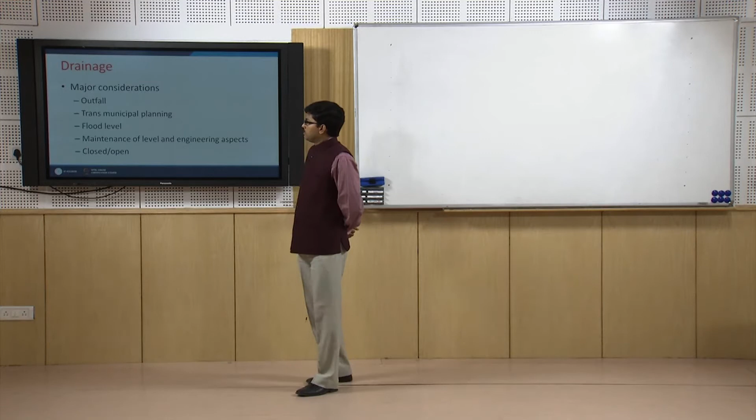So for this we already had a discussion on the last day covering a few points. For any drainage development, what are the major considerations? Before we come to the points - drainage is important because to develop any township or city, the most important aspect of vulnerability of a particular area is the flood situation.

During any rainy season, an area can go below flood level and flood water can come in. So it is always important to check the flood level of any area before development of any housing project. So flood level - maintaining the flood level - is very important.

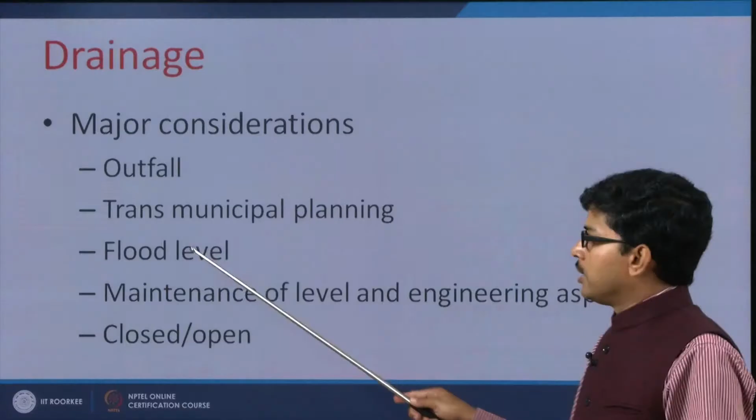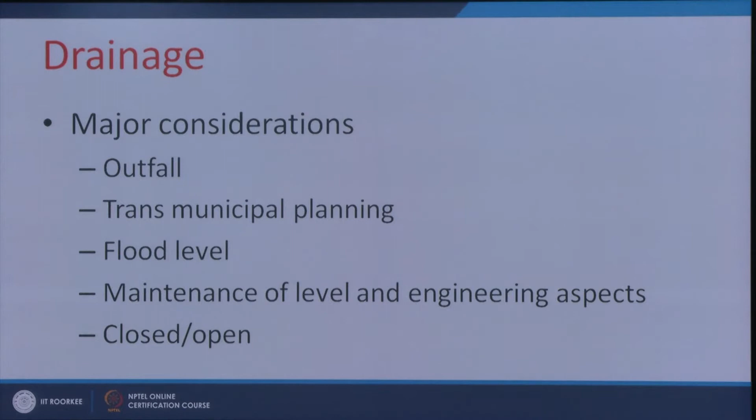Apart from flood level, another point is outfall - where the drainage water, the surface drainage water, will go and be disposed of. For any housing or township development, huge areas are under concreting or hard surface. Because of the hard surface, it does not absorb the rainwater or surface water, and as a result this water comes to the outfall area.

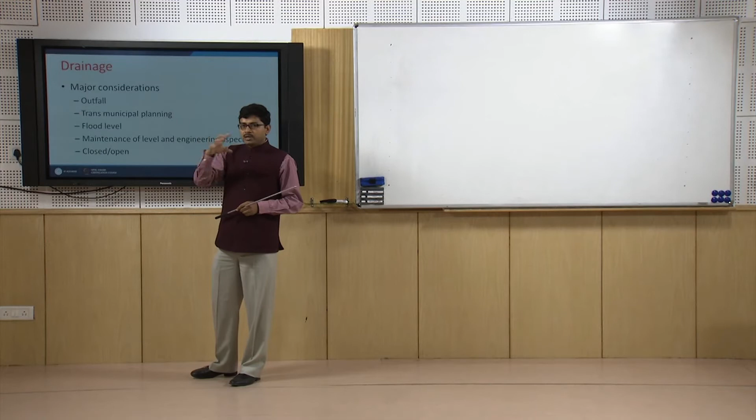Outfall can be for a city or an overall township, or outfall can be at the local level. In some places, a particular municipal area, town or city may not have outfall because of its location. So there could be a possibility of trans-municipal planning - we can take a few municipalities, smaller and medium townships, and combine them to make a larger drainage facility, orienting and guiding them to a larger outfall facility.

Also, maintenance of level and engineering aspects are very important for housing development. We can go for closed or open drains. For drainage, one major point is that along roads we provide drainage on both sides - like last day we discussed arterial roads, sub-arterial roads, collector and local roads. For each kind of road, surface drainage is provided, and those drains could be closed or open.

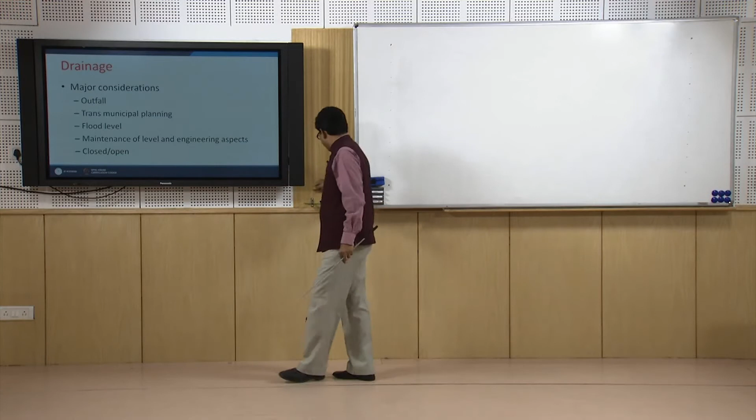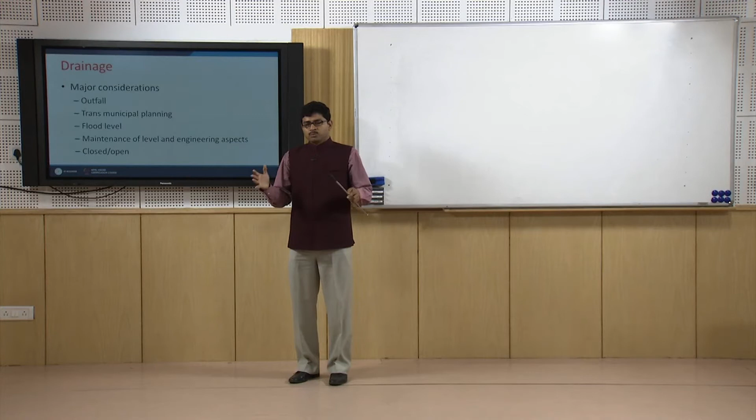One more point - if the township is very huge and large, for maintaining the slope, sometimes a lifting facility or drainage pumping station could be required. For drainage space generally you don't need a separate space for design, because it's accommodated along the road, but for a pumping station you definitely need a bigger chunk of land, so that water can be pumped to a different level and go to the final outfall, which can be a river, canal, or any other natural outfall.

Usually for the final or external outfall, we treat natural sources of water as the major means of outfall. Apart from drainage, we have power supply or electricity. Electricity can be generated through four different modes - thermal power plant, nuclear power plant, hydro power plant, or renewable energy.

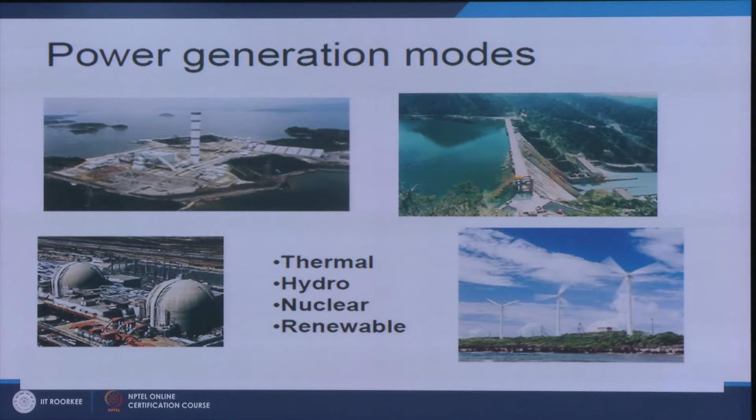For housing development or city development, we need to establish the areas where substations will be put, at various levels based on the city level or local level. These area requirements are listed in the norms and codes.

Apart from the substation area, we need to accommodate electrical installation along the road. Sometimes the electricity wires are put underground, or they can be overground. Whatever it is, we need a dedicated space for electrical installation along the road and at the substation area.

If you are going to develop a large area of land in a bigger housing or township project, you have to keep some area ranging from 2 to 5% for power generation, power distribution, electrical distribution, the substation, and the distribution wires along the roads.

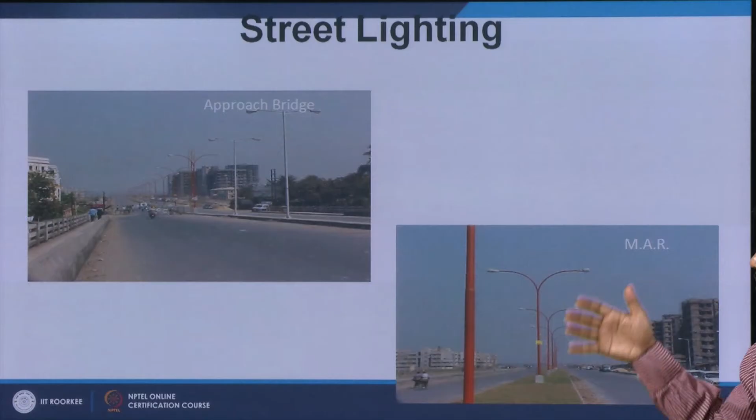Along the road you can put areas for the street lights, and on both sides, if the road is very wide like an arterial or subarterial road, the electrical installation can be accommodated.

Then we come to sewerage and sanitation. This is very important, because without this facility, a raw plot or agricultural plot does not become a livable plot. There are separate systems of sewerage and sanitation, and the objective is to have sustainable disposal of human excreta and related liquid waste.

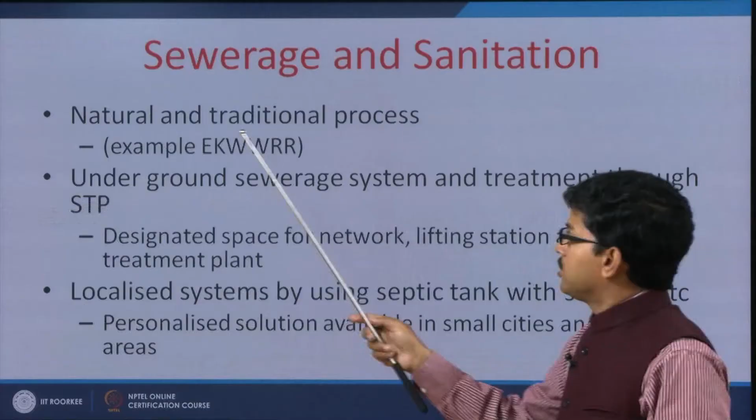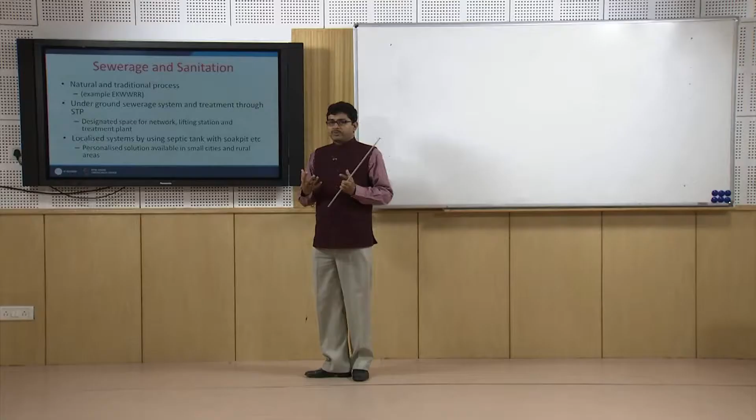One approach is the natural and traditional process. For example, the East Kolkata wetlands and waste recycling region is a very huge recycling region where a natural process recycles the wastewater and sewer.

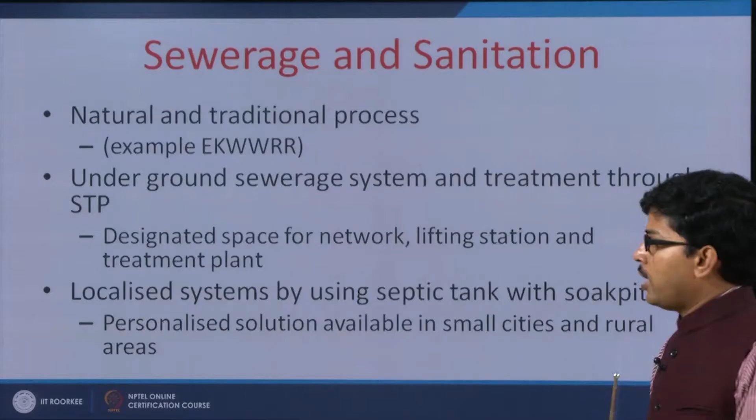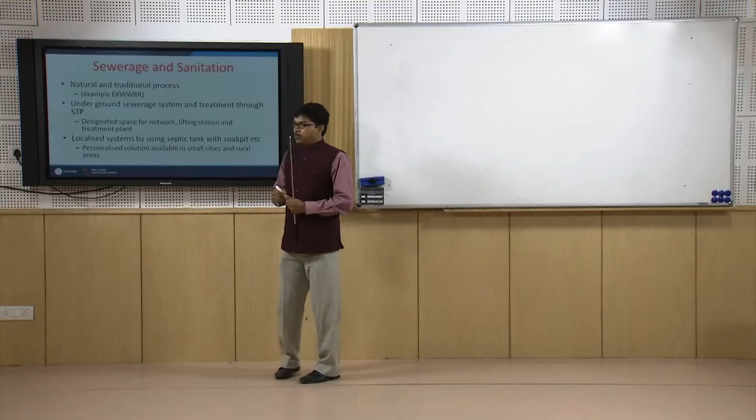Apart from the natural process, there could be an underground sewerage system where you establish a sewerage treatment plant, and from the treatment plant you can have several distribution ducts, as in a planned underground sewerage system.

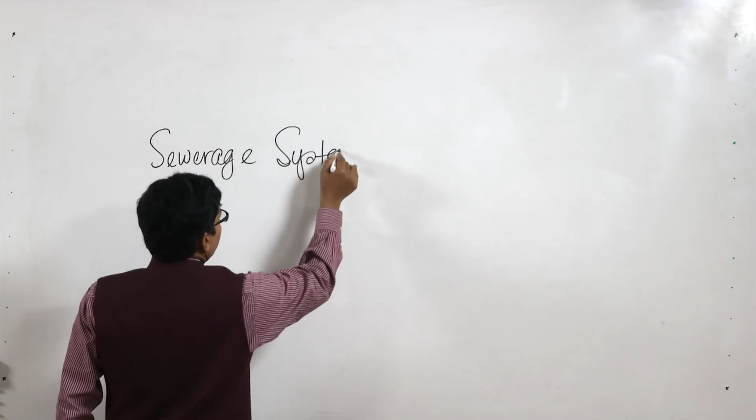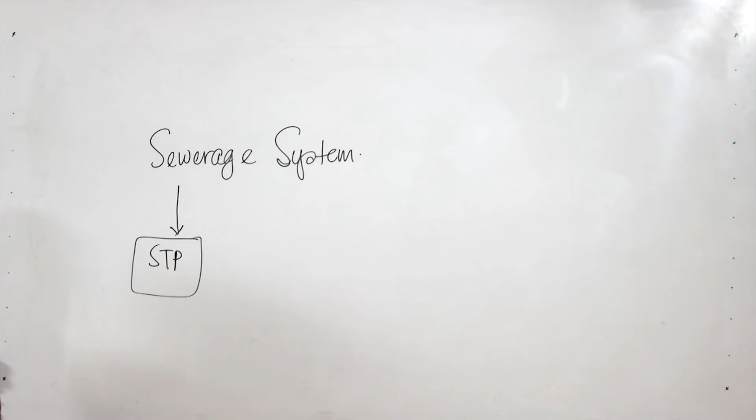You have the STP. Now STP takes a very huge area, 50 to 60 hectares in a bigger project, and from the STP you have to have the distribution.

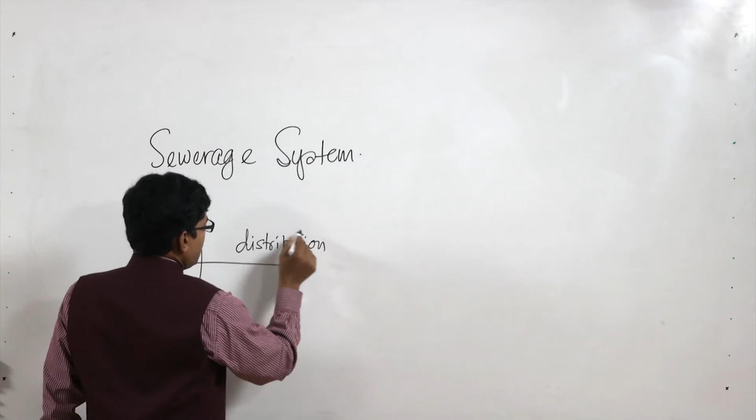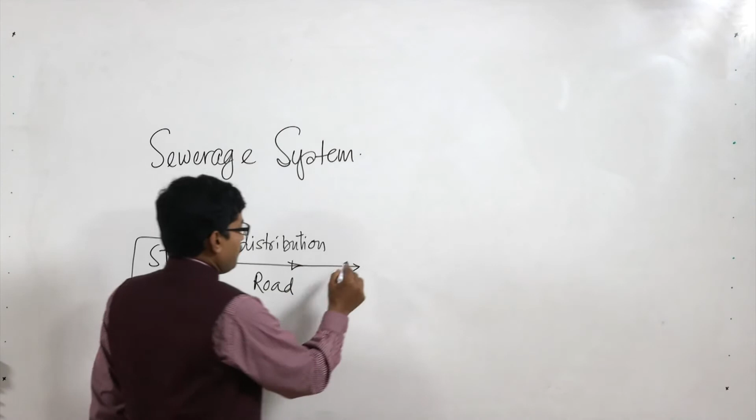The distribution runs through the road, below the road, or sometimes it can be distributed below the ground in green open areas. And to maintain the slope, sewerage lifting stations are also provided.

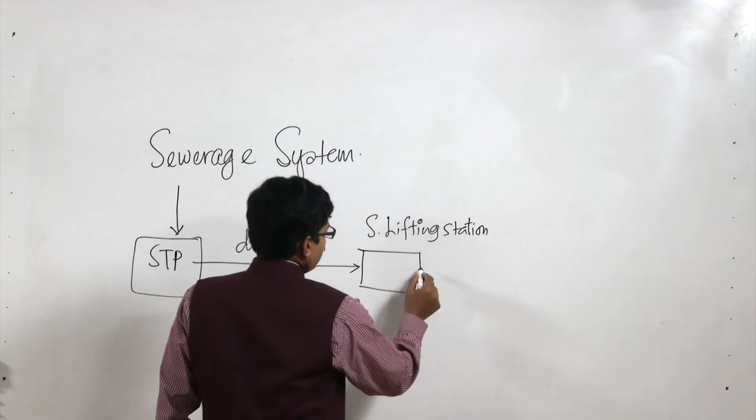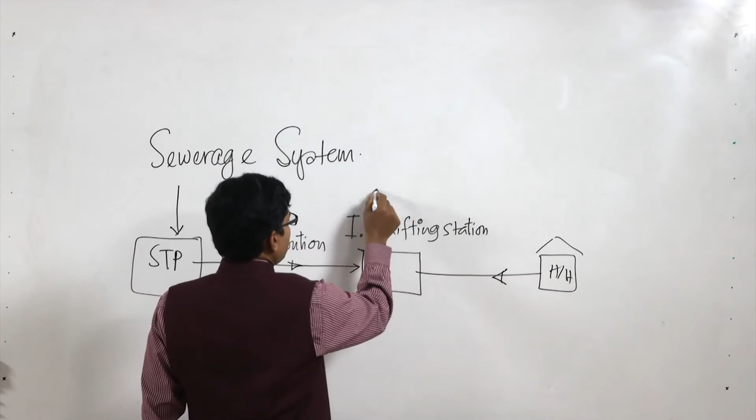This is the household, so from the household the sewerage comes like this to the intermediate sewerage lifting station, ISLS, and from the sewerage lifting station the sewer comes to the STP for treatment. This is the fundamental process.

The intermediate sewerage lifting station requires some amount of space, ranging from 50 to 60 meters by another 50 to 60 meters, and the sewerage can be taken below the road or below any other open space.

For example, if this is a local road, last day we discussed the sections of various kinds of roads. Usually sewerage is taken below the road through sewerage pipelines, whereas the drainage is arranged differently.

The objective is that surface water can come to the drainage, and also the water from the household.

This is the building. From the building the surface water can come to the drainage box, and also from the road the water can come to the drainage box.

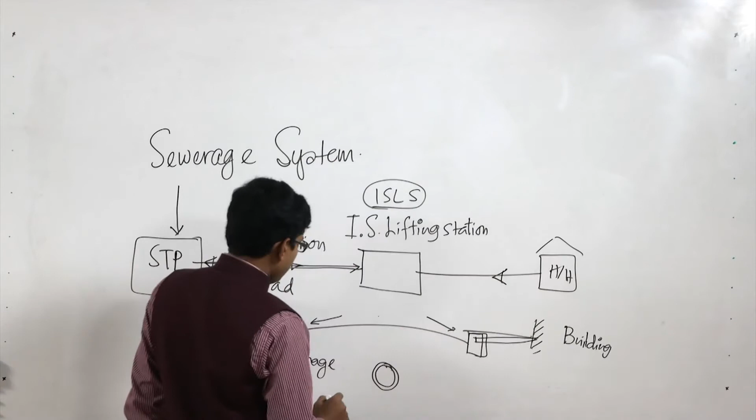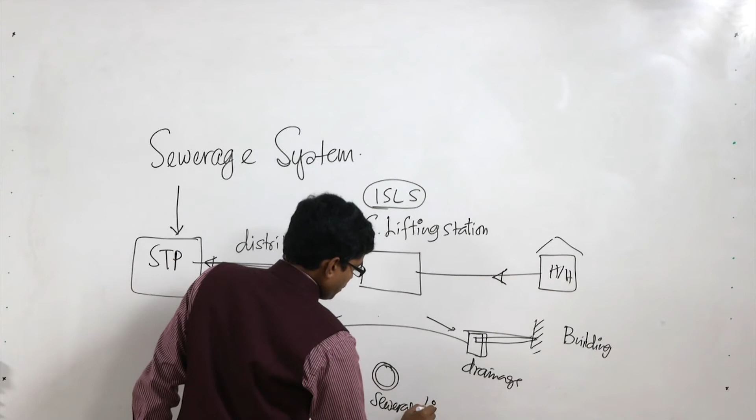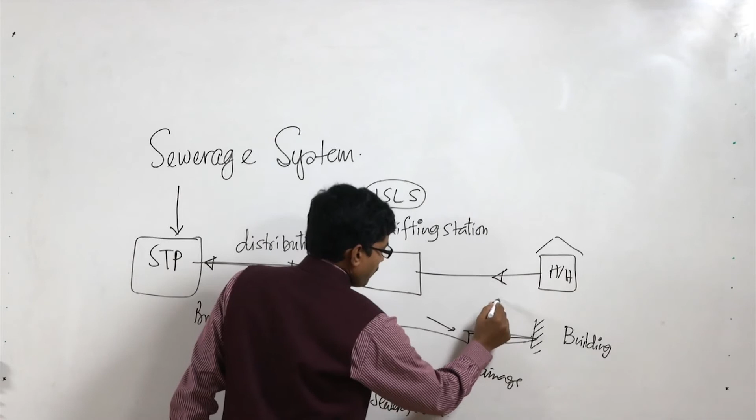Drainage can come on both sides of the road, and this is the sewerage line. We can also keep dedicated space for electricity. So this is the arrangement for local roads.

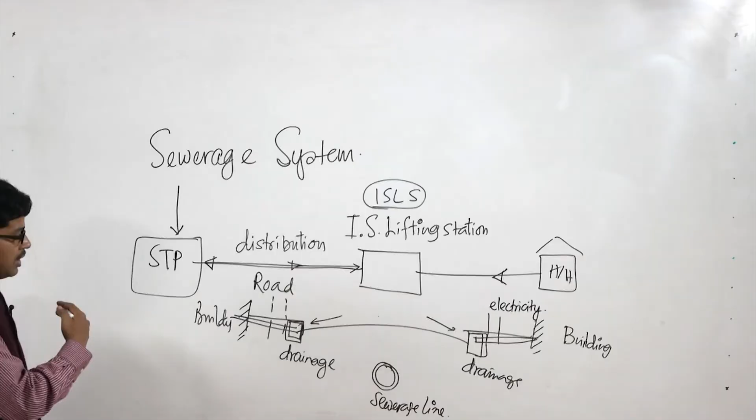If it is an arterial or subarterial road, similarly this can be distributed over the whole area, and a greater number of drainage pipelines or drainage boxes can come in that case.

Apart from the sewerage treatment process, including the sewerage treatment plant, lifting station, and network, there could be a localized system like the septic tank or soak pit, which is popular in various rural and suburban areas, where an individual family, a standalone housing project, or a small community can have a bigger septic tank for their sewerage or sanitation facility. This personalized solution is available in small cities and is very popular.

The advantage of this facility is that it is maintained by individual initiative, so the authority does not have to put in any extra money. But the disadvantage is that sometimes it can create problems in the area because of non-maintenance.

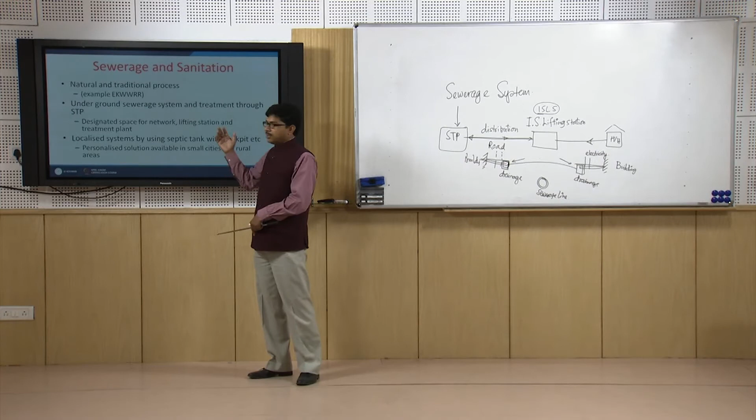The advantage of the underground sewerage system is that it provides land suitability and an effective system using a minimum amount of space, since you are not using space for a septic tank. That space is saved through the sewerage network, but it is definitely a costlier option than the individual septic tank. So both have advantages and disadvantages as far as township and housing development is concerned.

So, this is the example of the East Kolkata wetland and the wastewater recycling region, which basically recycles the waste and the sewer water from the city of Kolkata. Lot of natural water bodies are there, and these water bodies have fish. The fish are sewage fed, and because of the sewage feeding they recycle the sewage in a natural way. So, this is one unique example.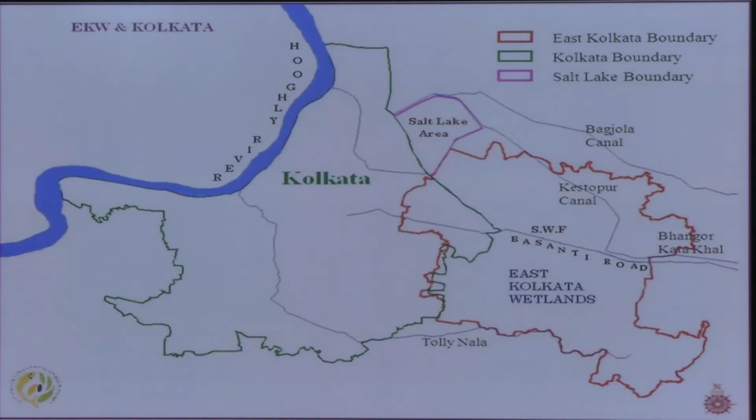Because of this unique example, the residents of Kolkata or the housing projects over there get the benefit, but definitely for other areas like New Town Kolkata or other cities we showed, they need to have a sewage treatment plant or a personalized facility like the septic tank.

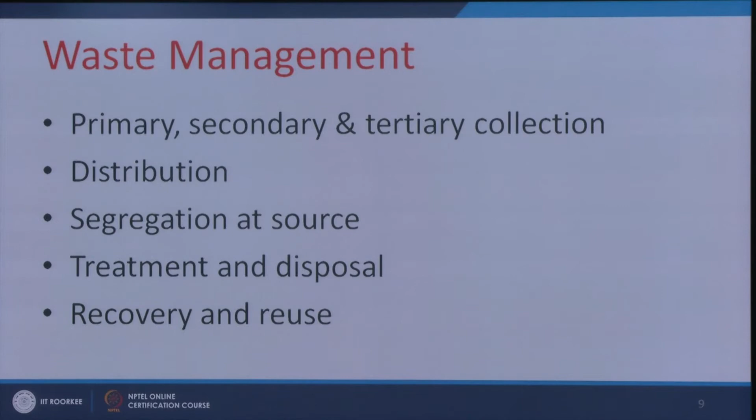The second important part is waste management. For any housing area or locality, you have seen that one of the major problems in today's life is waste management. Everywhere you will find that solid waste or liquid waste is lying in the road or open areas. You have heard about the Swachh Bharat Abhiyan.

The objective of the Swachh Bharat Abhiyan is to have 100% waste management in our cities or housing areas, and also to eliminate open defecation for our country. So, apart from the Swachh Bharat vision being a mission for all of India, for every housing project or township development, waste management is an essential service, essential infrastructure we should establish.

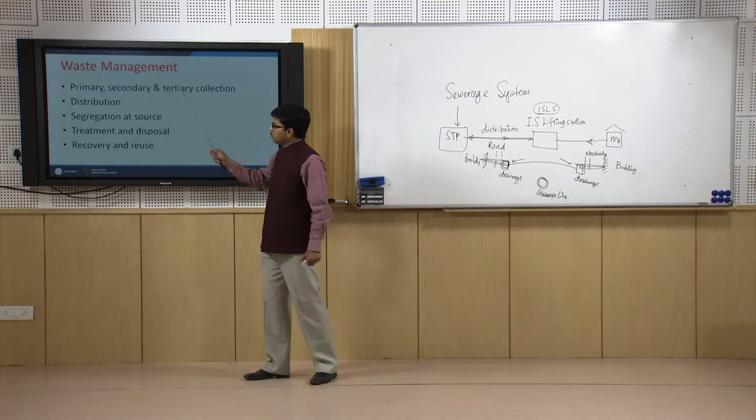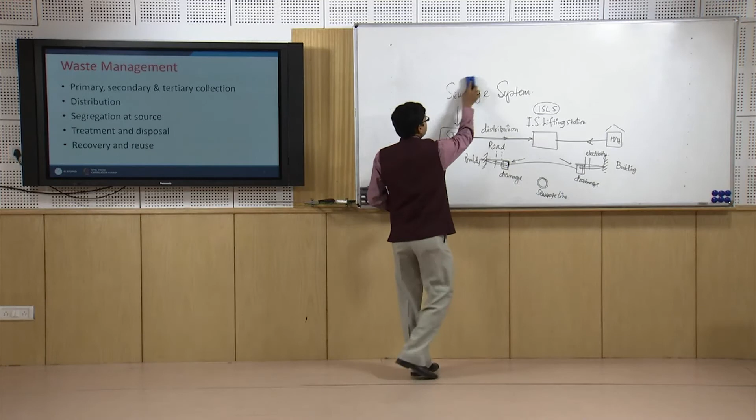So, waste management has several stages like collection, distribution, segregation, treatment and recovery. We have several stages of collection. It can be collected at the household level, and at the household level the waste can be collected.

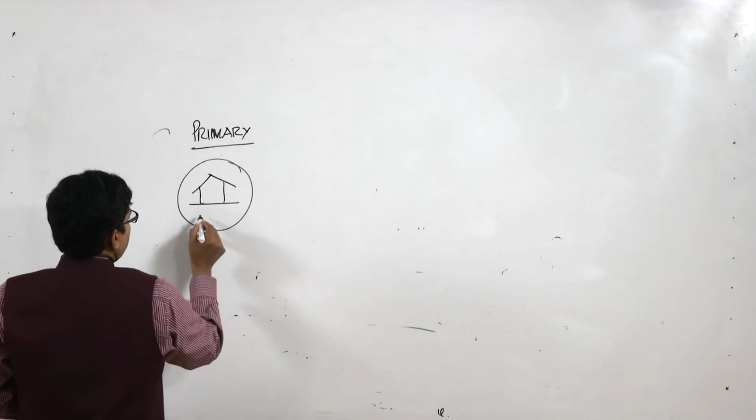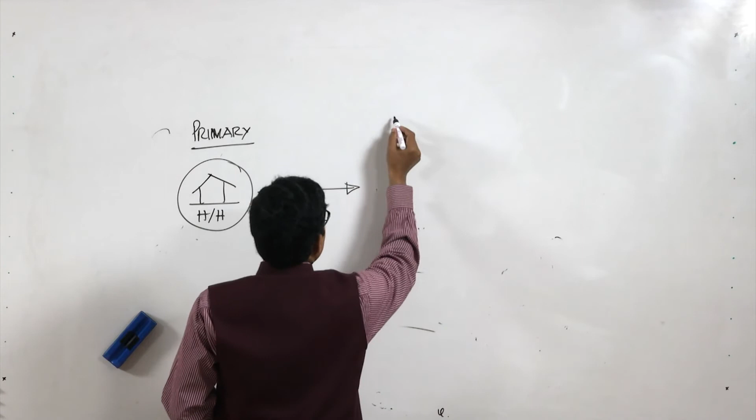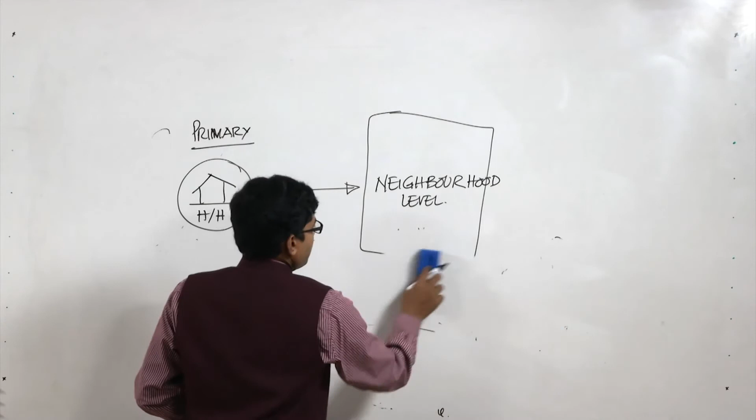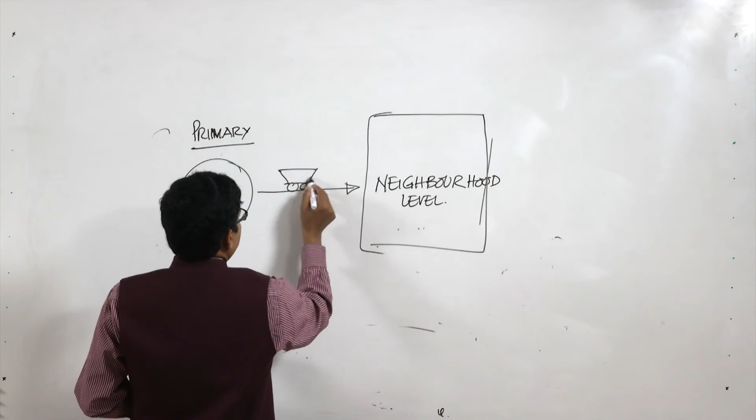At the household level the waste can be collected and then carried to the neighborhood level. The neighborhood level collection can be through the garbage vats provided by the municipal authority, or it can be carried out by manually transported carts from the household to the neighborhood level. So, this is the primary collection.

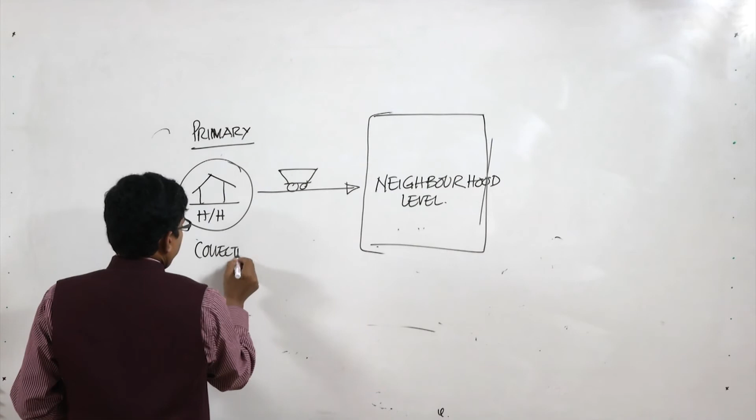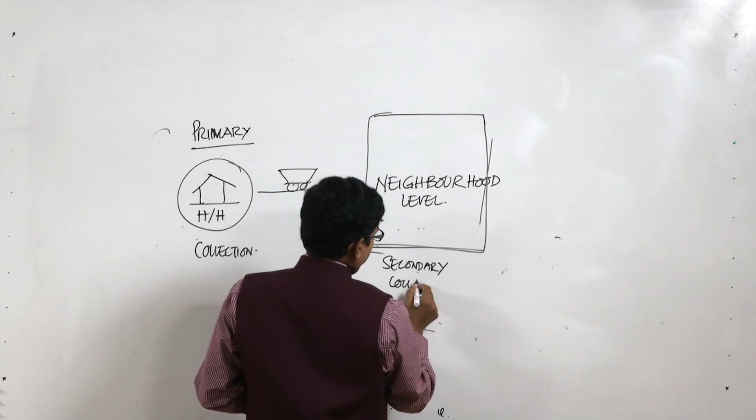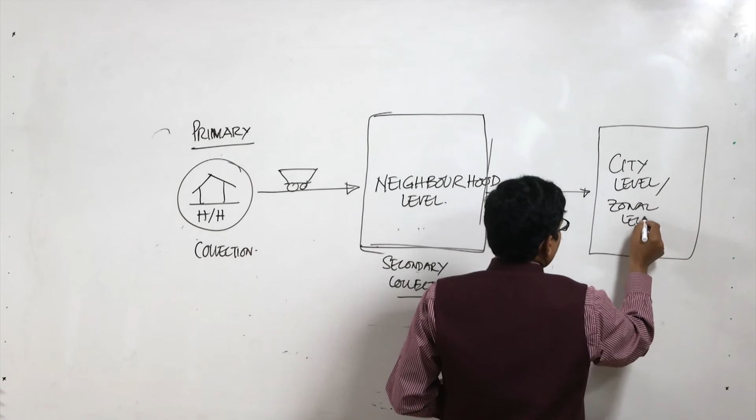At the neighborhood level it is the secondary collection. After that it will be transported to a designated area in the city, where at the city level or zonal level, large amounts of area will be reserved to bring the waste, which we call the tertiary collection.

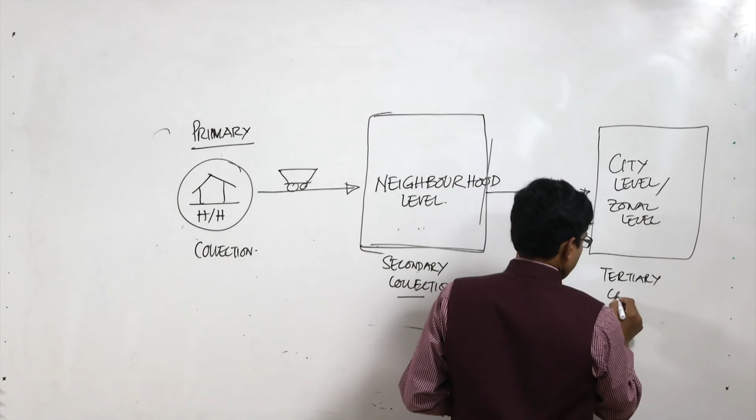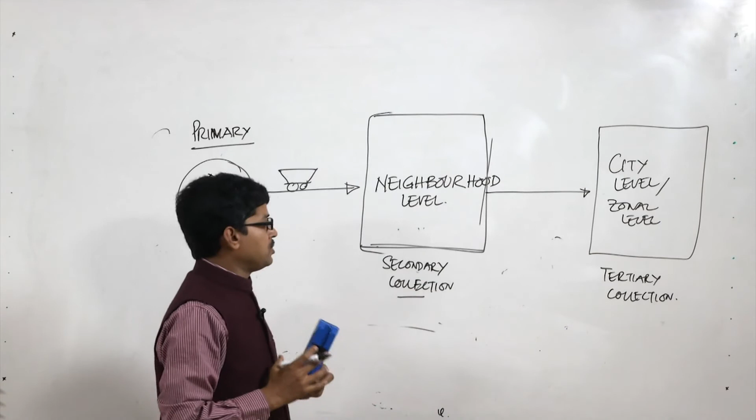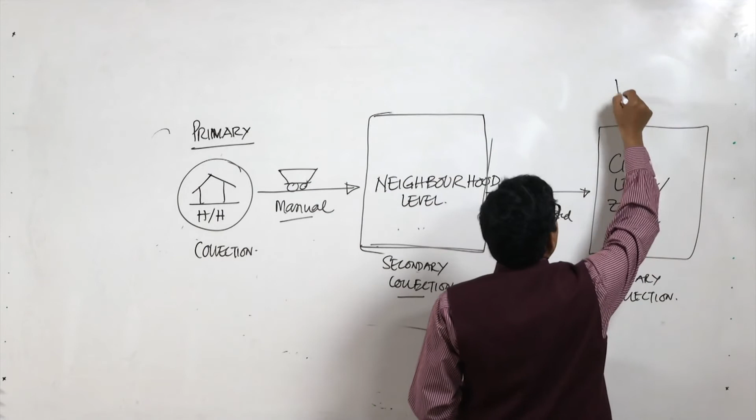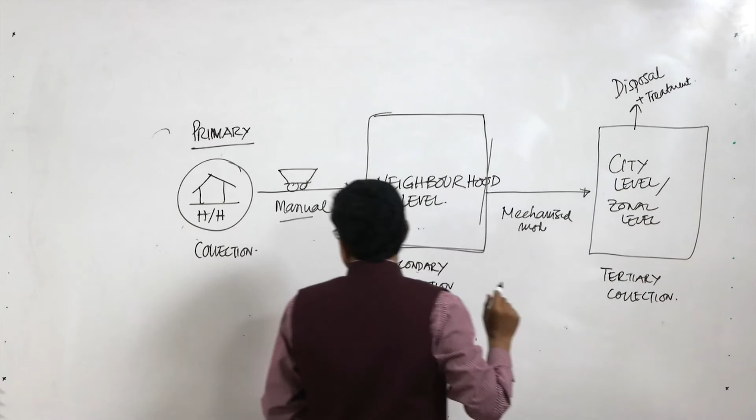So, from secondary to tertiary, since this part involves a much larger amount of garbage, it is basically not manual. It can be manual, but mostly it is handled by the mechanized mode. After this we go for disposal and treatment. So, this is the mechanism of waste management as far as housing or residential areas are concerned.

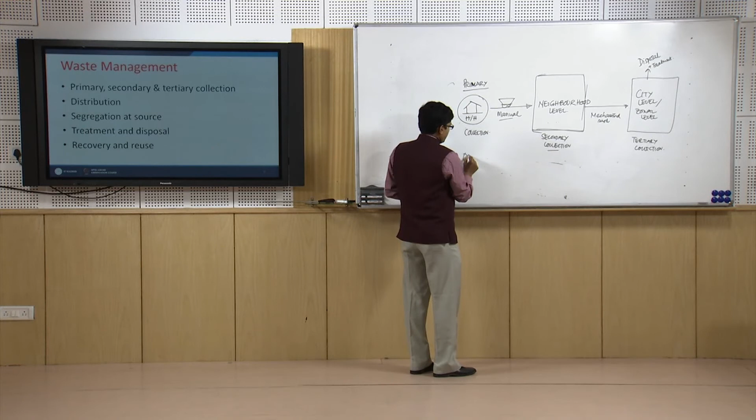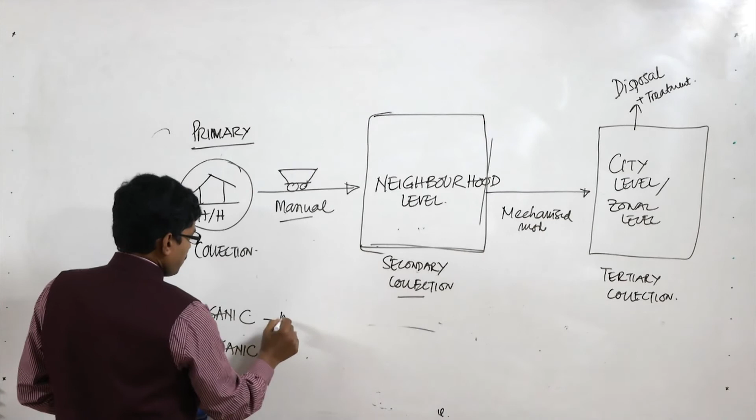Another very important concept here is segregation. We basically have organic and inorganic elements of waste, and for every treatment the segregation of organic and inorganic waste is a very important part.

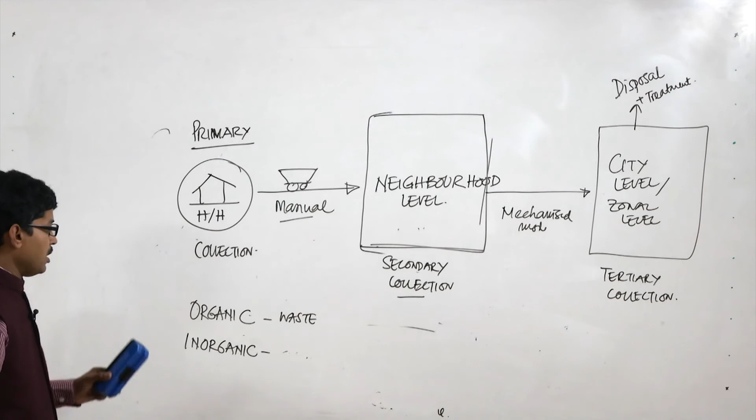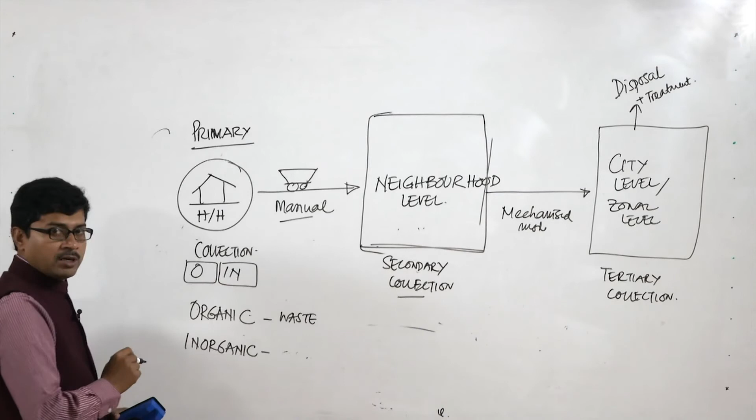One objective of segregation is whether we can segregate this organic and inorganic waste at the primary level using different kinds of bucket systems or different colored bucket systems, so that organic and inorganic waste can be collected separately and then carried separately to the neighborhood level collection facility. This makes the overall process easier and more user friendly.

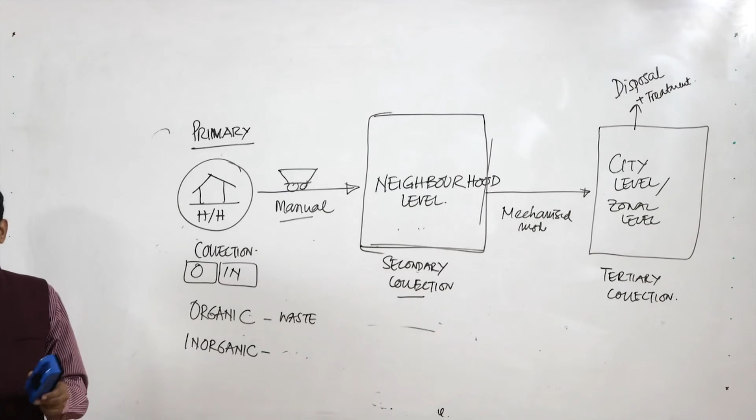For the distribution at the secondary and tertiary levels, we need substantial land space at a suitable location in the locality, so that we can accommodate the collection facility. But it should be designed and planned so that it does not disturb the neighboring area or emit foul smells, while still being located adequately so that it can collect the garbage from the overall neighboring area through the primary collection. So, that is the distribution facility required at the township level.

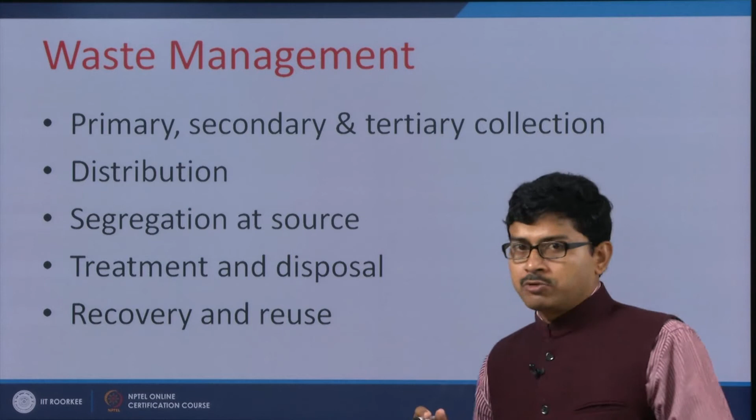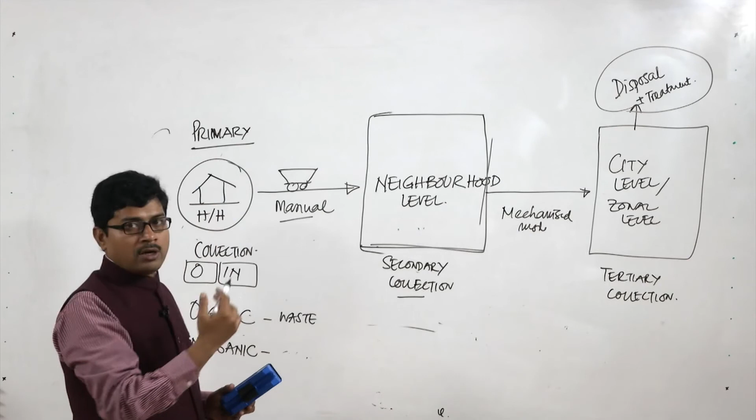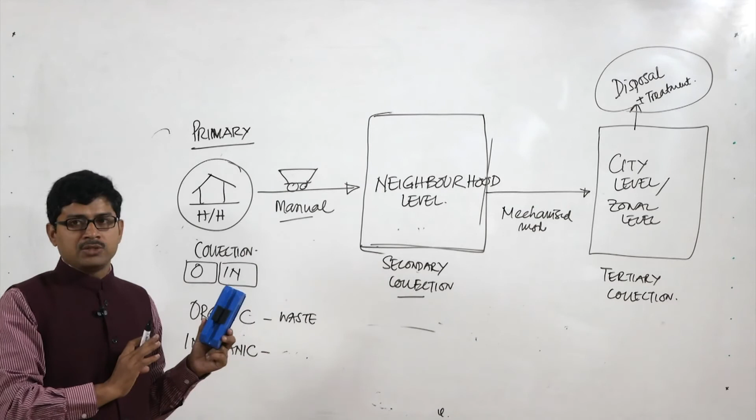Segregation we discussed, then the treatment, disposal, recovery and reuse. At the disposal level, though it is not fully under the scope of the current course, the recovery of cost is a very important part in waste management. Unlike water supply or electricity, waste is one area where recovery is very challenging, because nobody is ready to pay money for waste recovery.

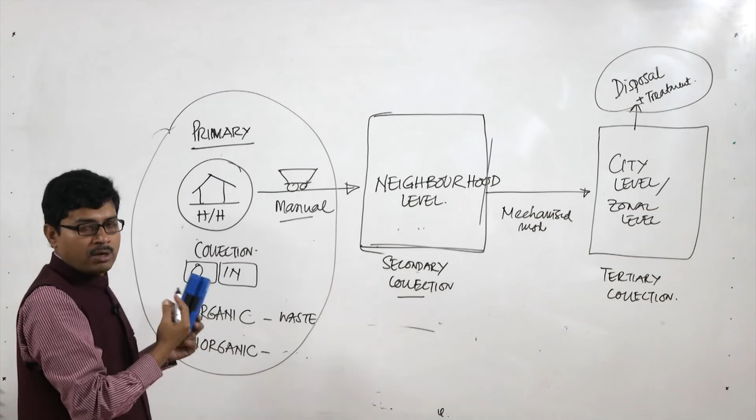So we can pay for the primary collection, the people who are collecting waste from our household level, but what happens after that when the waste goes for disposal and treatment.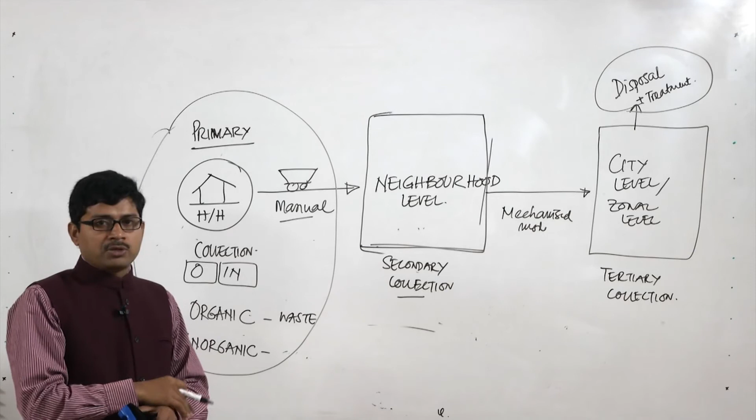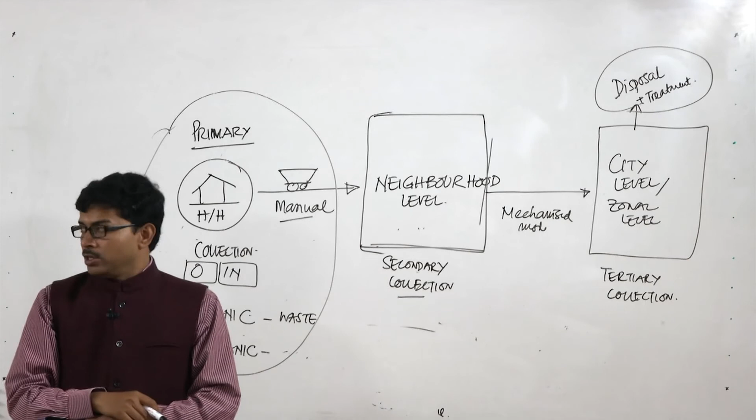There are means and methods where technically and feasibly we can recycle the waste, and from the recycled waste we can develop several products, and these products can be utilized for the recovery of the projects. So the whole method of primary, secondary and tertiary collection, disposal and treatment could be designed in such a way that in a township it functions sustainably, both as far as the environment is concerned and as far as economic recovery is concerned.

So waste management is a very important part. Don't neglect it wherever you get the opportunity to plan and design the township or the housing development.

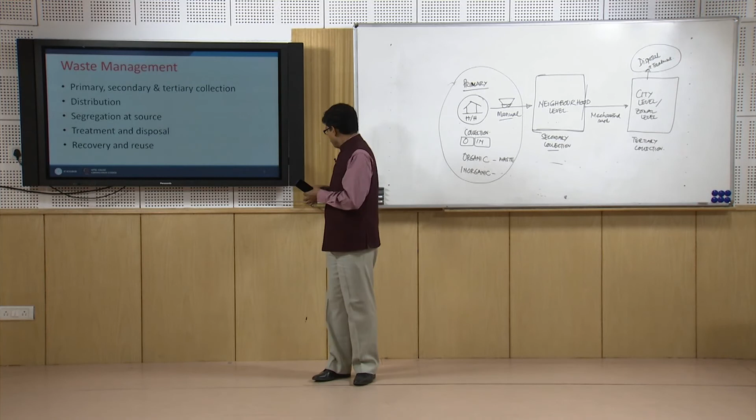In the next lecture we will come to the discussion of social infrastructure, but before we close this session let me mention a few more infrastructures which we deal with apart from electricity, sewerage, sanitation, drainage and waste management, like gas supply and petrol pumps. These are very important physical elements or facilities required.

Sometimes, as in a few townships, gas supply is possible through a pipe network. If gas supply is given through the pipe network, adequate space should be kept for it in the road or in some other suitable place. Other than that, a distribution network of gas and petrol pumps, and gas distribution stations, are required at various locations in the township.

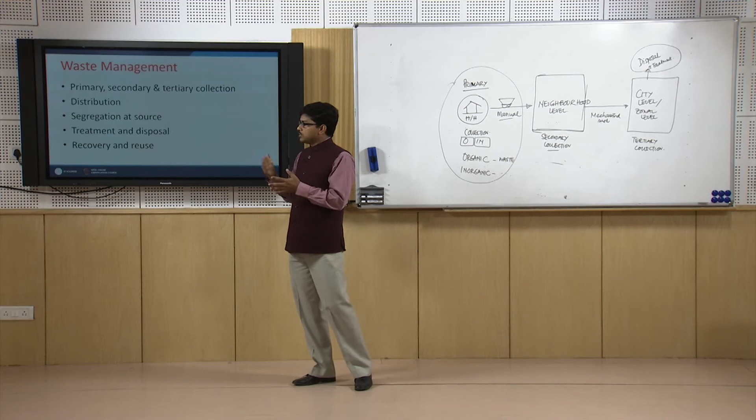Apart from that, a few more physical elements like terminals - we have discussed about the road, but apart from the road we need large terminals like railway stations, ports or metro stations. How terminals can be integrated with the other elements of residential development is very important as far as the development of any housing or residential area is concerned.

Please take a mental note that for any residential development, a very important part is how it is connected with the commercial area or the areas where job opportunities or job locations are. So for that, connectivity and linkages are very important. For this reason, road connectivity, linkage and nodes are very important to locate and design.

Apart from road and transportation, which we discussed today, for drainage we discussed that the very important part is the outfall and the distribution system, and drainage is designed and located in the road itself. We discussed the electrical system - similarly the electrical system is placed below the road, but we need substations at the sector level and the city level.

After that we discussed the sewerage and sanitation system, consisting of the sewerage treatment plant, its network and its collection at different locations. It can be naturally treated, mechanically treated using a sewerage treatment plant, or designed as a personalized means like septic tank and soak pit.

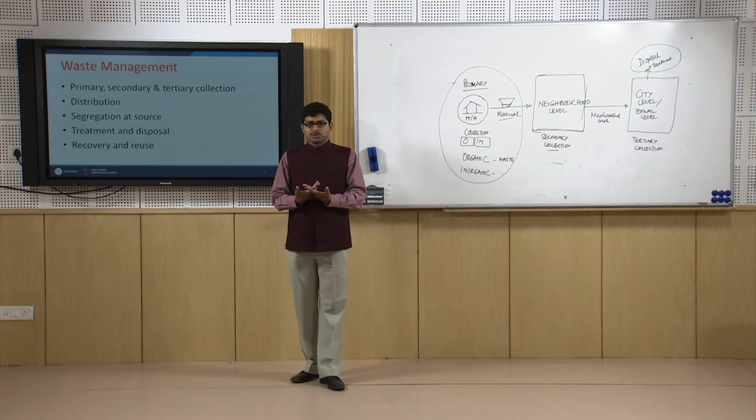Finally we discussed waste management, where waste can be solid waste, liquid waste, biological or medical waste, but for our case of housing development, the solid waste coming from households on a day to day basis is very important. Two kinds of waste are there: organic and inorganic.

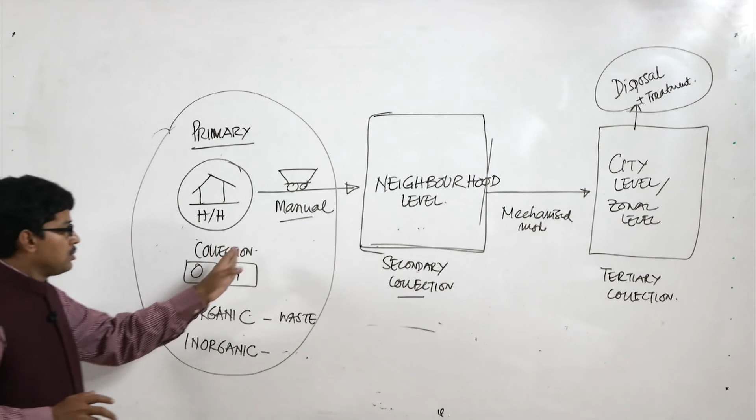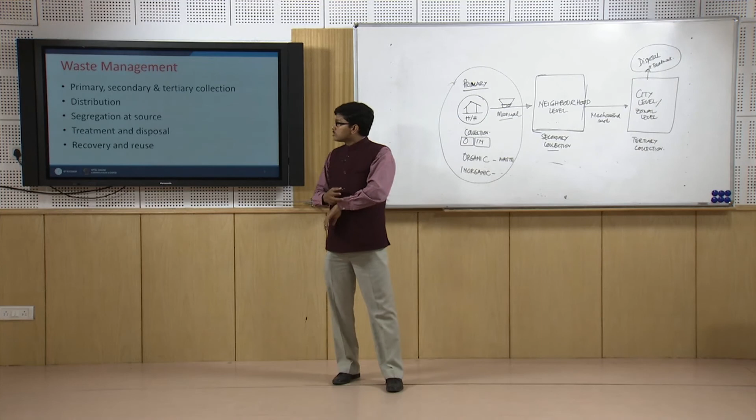The objective is to segregate them at the primary collection, that is at the household level, and then transport at the neighborhood level as secondary collection, and at the city or zonal level for the tertiary collection. The major part of waste management is its treatment and disposal, so that we can earn recovery of the amount we invested for this purpose.

Next day we will discuss the other part of infrastructure and facility, the social part. So far we have discussed road, transportation, drainage, electricity, waste management and sanitation, and also mentioned a few more elements like gas supply and petrol pumps. Next day we will discuss social facility, social infrastructure, and the community facilities and amenities required at the site or beyond the site, which is very essential. We will also see the norms and standards, what kind of standards are there, and the space requirements and population standards which we follow to maintain all the social facilities. Thank you for today.